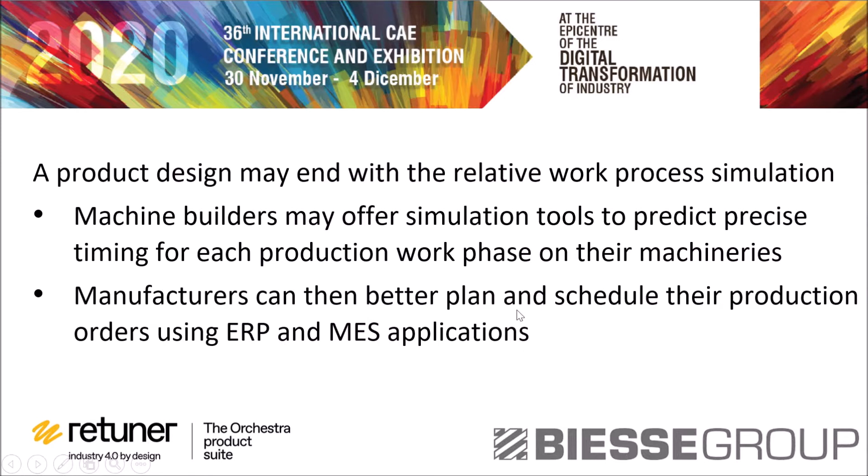Any product design may end with simulation of a work process. Generally, machine builders may offer specific tools to predict timing for each work phase, specifically for their machines. On the other hand, manufacturers can then, using this simulation data, better plan and schedule their production orders using their own ERP and MES application.

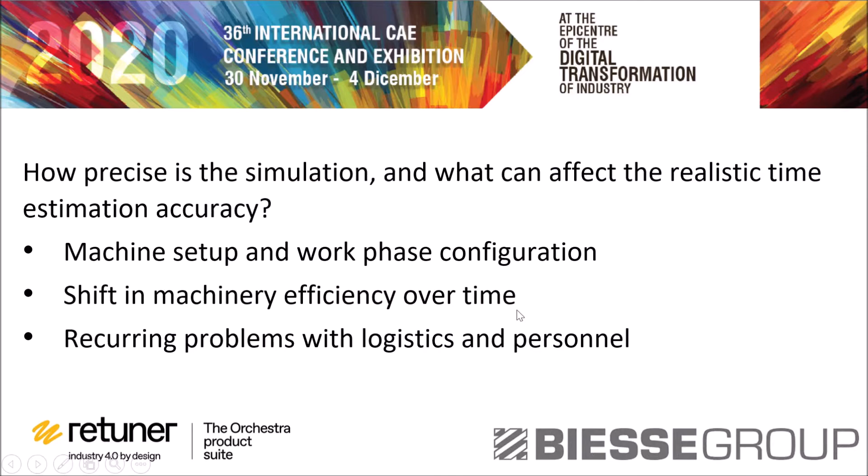But how precise is the simulation and how good can its accuracy be in estimating realistic times for each work phase? We have to take into consideration machine setup and work phase configuration. We have to consider any shifting of the machine efficiency over time, and all problems related to logistics and personnel who can really affect the efficiency of a production phase.

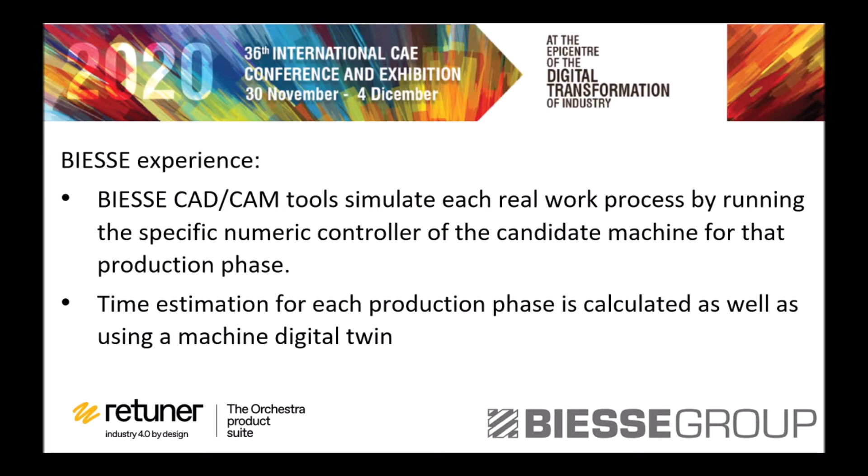Now, let's go inside the BIESSE world. In this presentation, I will talk about how to realistically calculate the production times of a product based on a system developed by BIESSE. Before that, I give you a brief overview of the BIESSE reality. BIESSE is a business unit of the BIESSE Group. Since 1969, it has designed, manufactured and marketed a comprehensive range of technologies and solutions for joiners and large furniture, windows, doors, and wood building components manufacturers. In recent years, it has also been active in the plastic processing machinery sector, developing ad hoc solutions for a growing market.

It consists of a series of applications. The main application, bSolid, offers an environment for the design, programming of machining, and the execution on the machine of a specific product. The platform also contains vertical applications to satisfy market requests, like B_NEST for nesting, B_WINDOWS for the design of fixtures, B_EDGE for edging, etc.

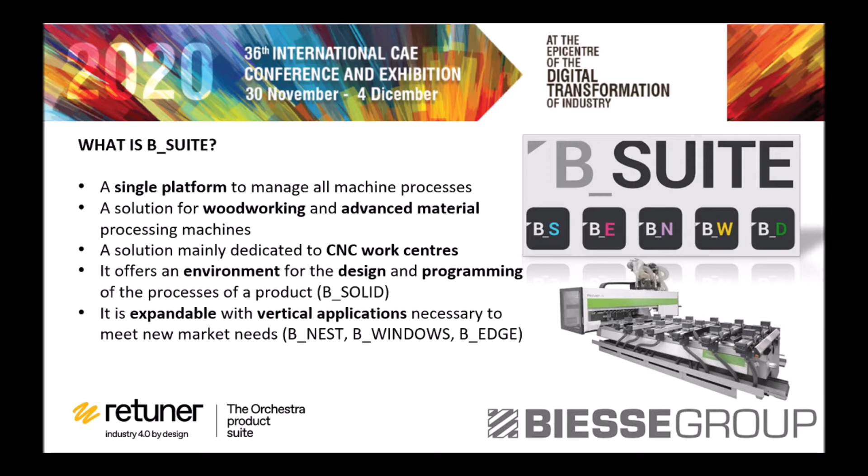Now let's enter the suite and let's see the main application, that is bSolid. bSolid is the center of the suite. All vertical applications of the suite interface with bSolid. bSolid uses various modules offered by the platform to perform its functions. The main modules are as follows. The CAD module offers all the features for CAD drawing. In this module, we can find all the functionalities for two-dimensional and three-dimensional modeling.

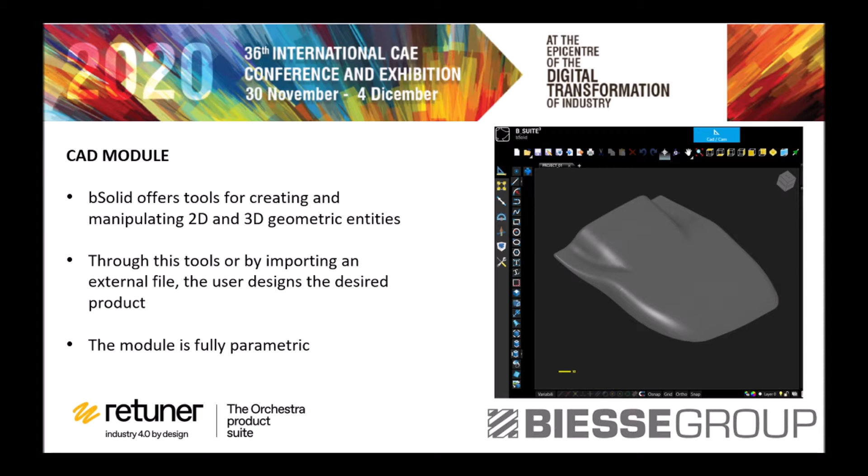As we can see in the image, the user has designed his object in a three-dimensional way. The CAM module is very extensive. Here we briefly...

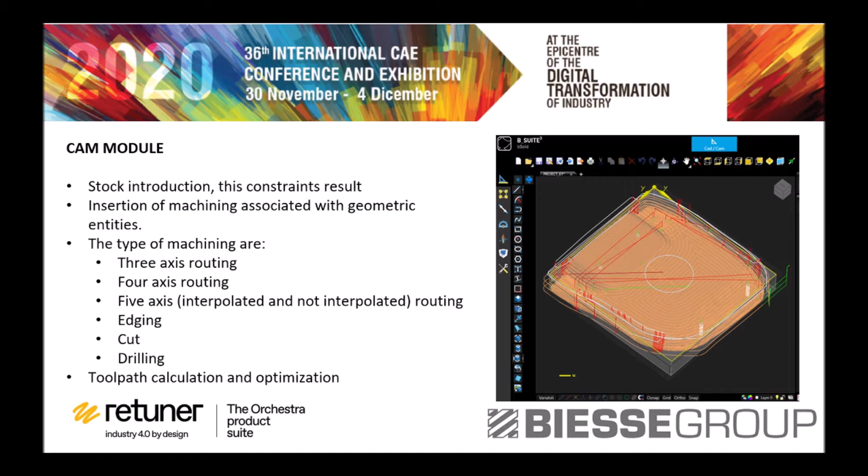During the design, the user often needs to verify that the programming is correct. This is the purpose of the preview module: show the result based on the toolpaths calculated by the CAM. As we can see in the video, the preview makes a mini simulation of the machining based on the toolpaths. The user can adjust the speed or can request to see the result immediately.

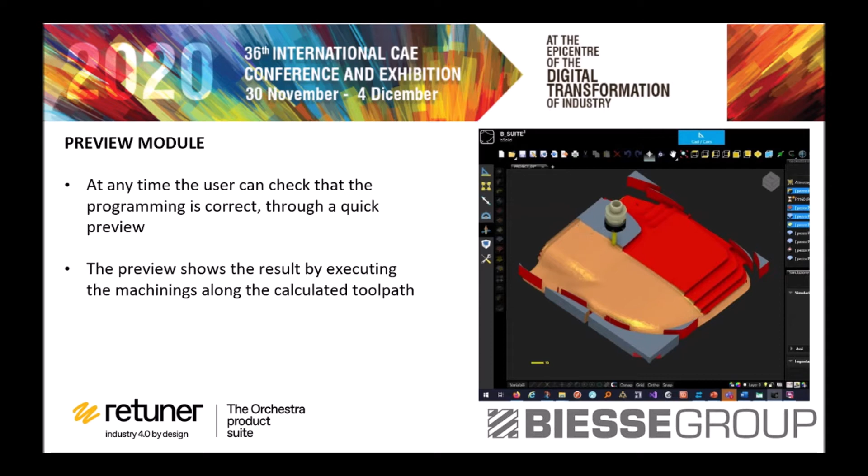In the main slide of B_SUITE, I said that a program is not only made up of toolpaths and geometries, but needs a series of machine operations to run on the machine. This is the scope of machine programming. Machine operations are many. The most important is the tooling of the machine work table, which must receive the piece to be machined.

Piece movements during the execution of the program. This can happen when the machine has to work on either side of the piece. Activation or deactivation of the vacuum in the supports. It's also possible to program a pause to allow the operator intervention, for example for a manual cleaning operation.

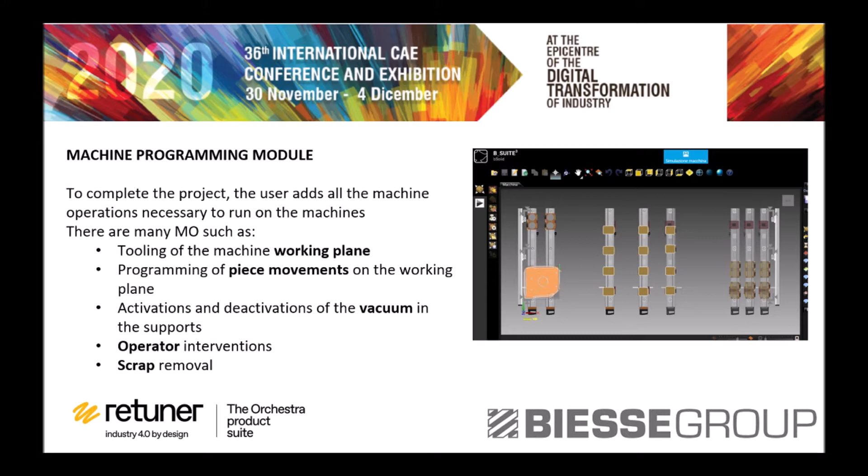Another important operation is the removal of scrap. This can be done manually by the operator or by intervention of a dedicated robot. In the following slides, we will focus on this module.

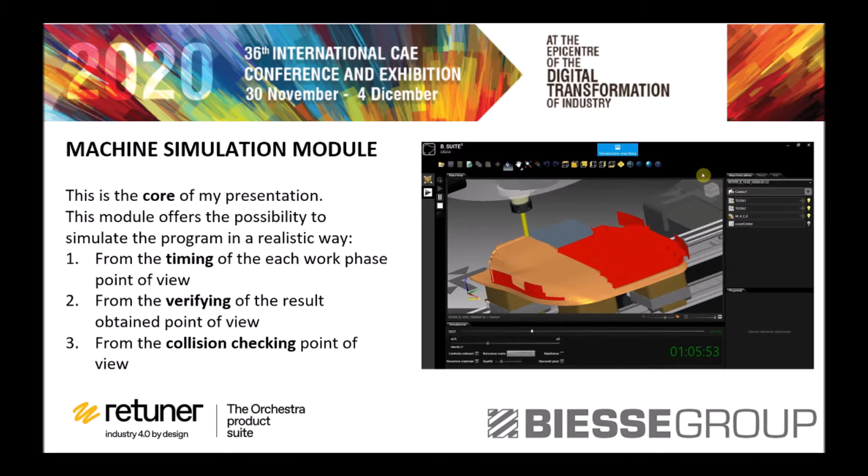The machine simulation module has the purpose to do a realistic simulation on a 3D machine. Realism is a requirement that customers have asked us for, to perform the following tasks. The first task, calculation of project execution time. The second, verify that the result is as expected. The third, but not the least, check that there are no collisions between the machine parts and between the non-cutting part of the tool and the pieces. The concept of realism is very important and will be described later.

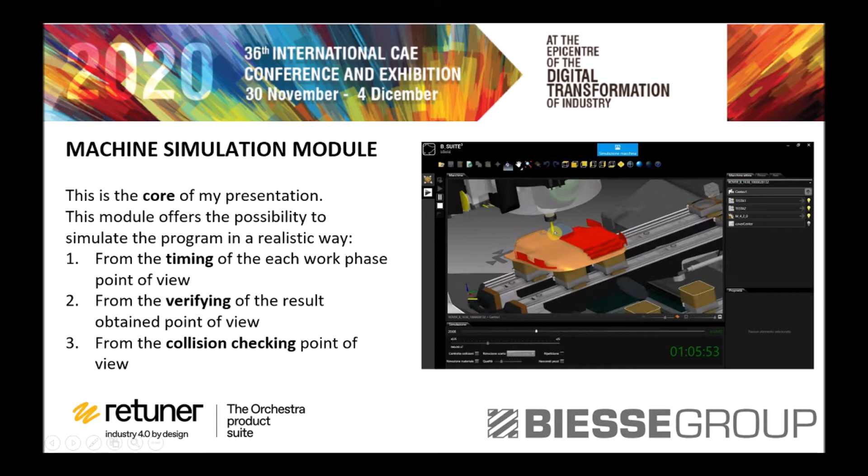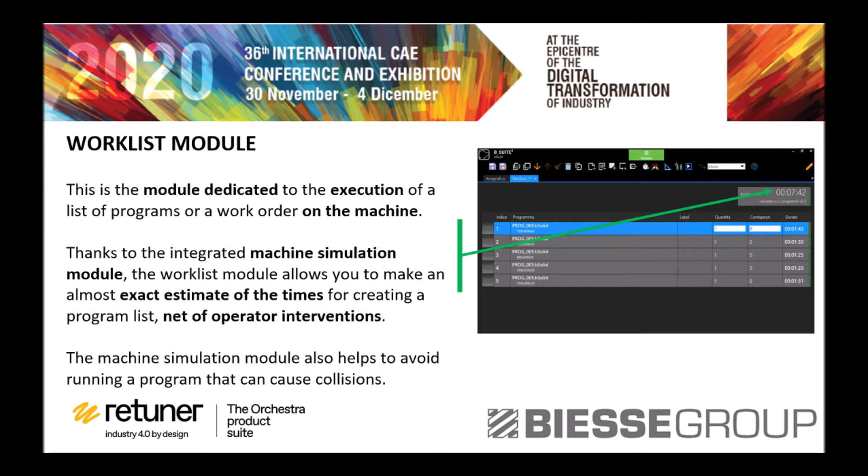As I mentioned earlier, let's focus on the simulation module. I said earlier, the module offers a realistic simulation. Let's start by asking ourselves this question: why is the simulator realistic? First of all, being a software department within BIESSE works out to our advantage.

First, the three-dimensional kinematic model of the machine is the result of collaboration between the designers of our department and the BIESSE technical office. So, the three-dimensional parts come from the technical drawings of the machine designs. As a consequence of the previous point, all the kinematic joints of the model reflect the real machine. Each type of tool aggregate device is synchronized with the real machine, both in terms of its data and in terms of its morphology.

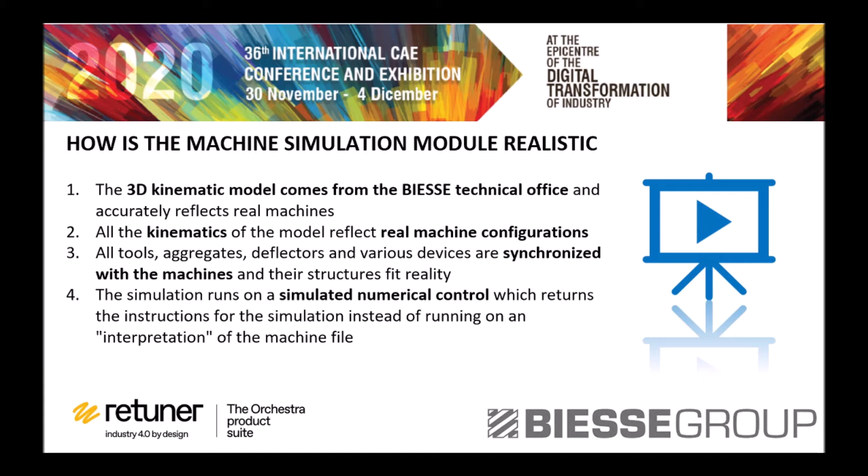This is a very important point. BSolid silently starts a simulated numerical control, which is the same numerical control present on the real machine. When BSolid simulates a program, it executes it on that numerical control, which returns the instructions for the simulation. This is important because BSolid does not do an interpretation of the machine file, but the work is left to the real numeric control. The simulated numeric control reflects the real control in the machine.

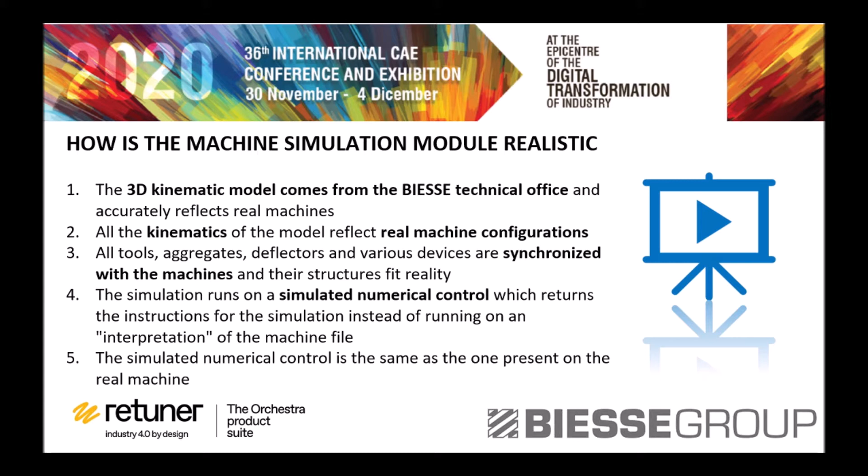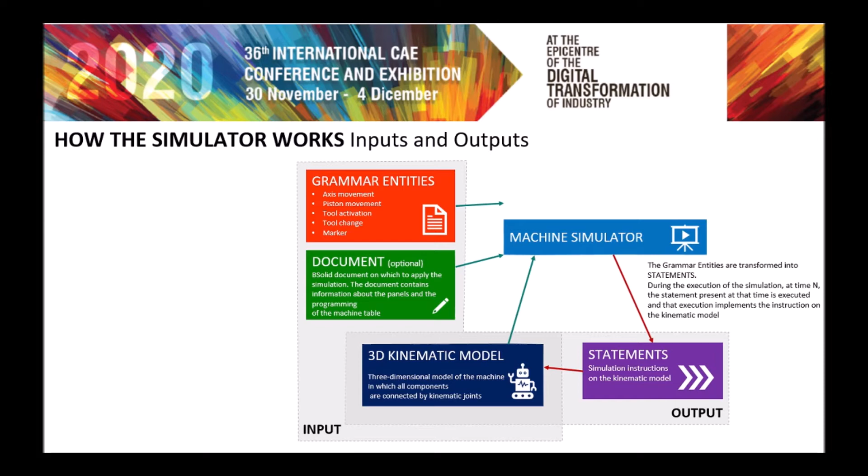In green, another input is the document to be simulated. It contains the piece, machining, and machine operations. In blue, the three-dimensional kinematic model of the machine. In purple, the simulator output, the statements. Statements are the simulation instructions which are applied to the 3D model during the execution of the simulation. In the following slide, we will analyze every single element of input and output.

Let's start with the kinematic model. That is one of the main points for the realism of the simulation. I just said that the technical department provides us the three-dimensional drawings of the machine. Our designers simplify the model by removing the parts that are not important for the purpose of collision control and the success of the simulation. Our designers assemble the various parts of the machine, connecting them with kinematic constraints.

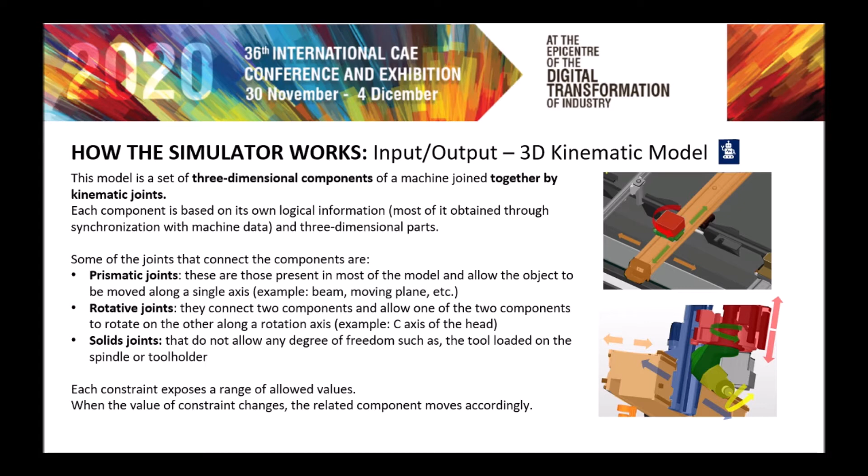For standard machines, the model creation operation is done automatically by the software. The software produces the machine model starting from the machine production list and the data of the numerical control and PLC. The joints that connect the components are of different types, including prismatic joints, like a beam movement, rotative joints, like a 5-axis spindle movement, and solid joints, like a tool loaded in a tool holder.

Another input is the bSolid document. The bSolid document is the result of user programming using the modules offered by bSolid. It contains work pieces, machine operations, and also equipment information like the position of the panels on the plane, top equipment, jigs, supports, plane, etc.

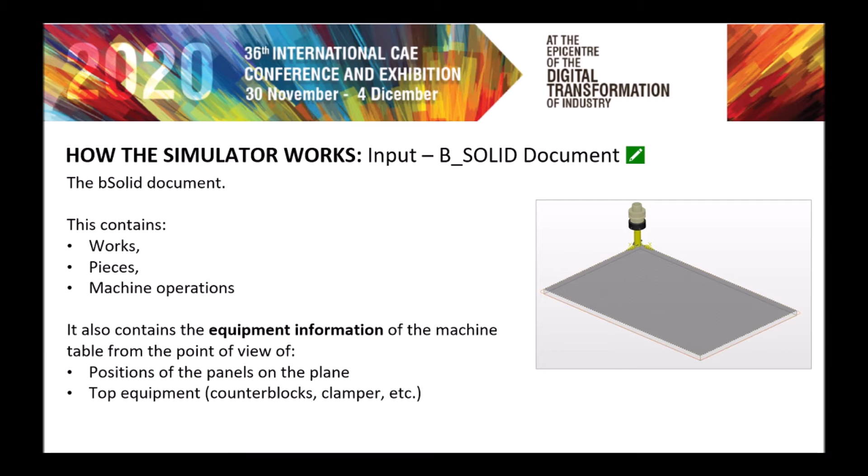Another core of realism are grammar entities. Now let's see how grammar entities are produced. Let's start with the user who requests the system to simulate a program or document. bSolid processes that program by calculating its machining, optimizing the machining processes, and generating the machine code, in this case ISO code. The ISO program is executed in the simulated numerical control.

The numerical control is made up of various services. One of these services includes a component called bSolid DLL, developed by us in collaboration with departments that manage the numerical control. What happens inside the bSolid DLL component? At each cycle, the bSolid DLL accesses positions on the shared memory of the numerical control, PLC tables and ISO markers. It makes the appropriate change checks and populates an instruction queue shared with bSuite.

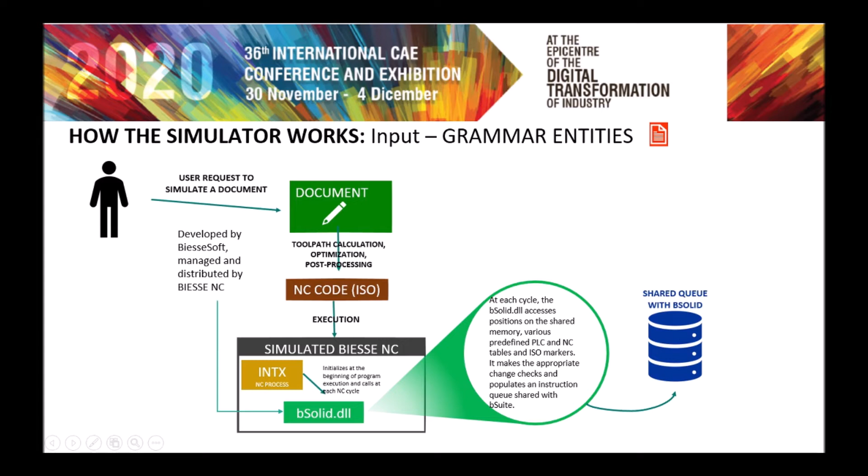The simulation module reads the shared queue and extrapolates the grammar entity. We can see that the grammar entity contains movement of an axis, tool activation, spindle activation, little simulation instructions.

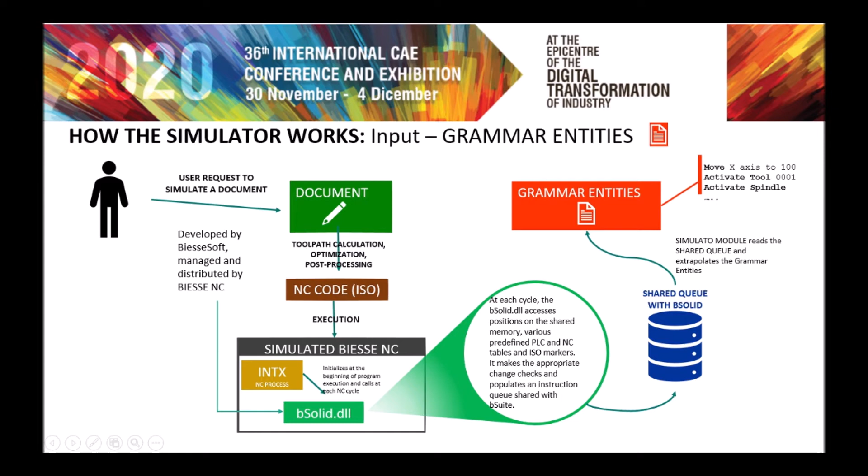Finally, let's see the output of the simulator, which we called statement. We said that the grammar entities are instructions from the numerical control. They are simple instructions, such as the movement of a machine axis, the activation of a tool, the loading of a tool, panel handling, etc. The statements are the result of the elaboration of the grammar entity by the simulator, and they are operations that act on the three-dimensional model to implement the movements of the simulation.

Simple instructions contained in grammar entities can give rise to more complex statements. For example, suppose we receive the movement instruction of axis A1. The simulator recognizes that that axis is associated with the gripper on the machine, which is meant to clamp the workpiece. The simulator then moves the gripper but also executes the piece clamping instruction. In the next slide, we can see this part of the simulation.

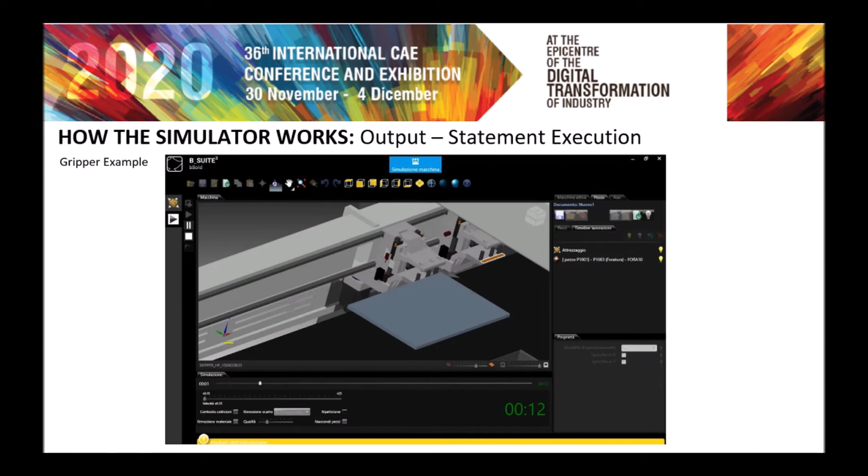Thanks, Marco. Very well. And now let's see what we do in Orchestra. We like to say that we retune SMBs to play the same Industry 4.0 music sheet. And let's take a look together at this small video.

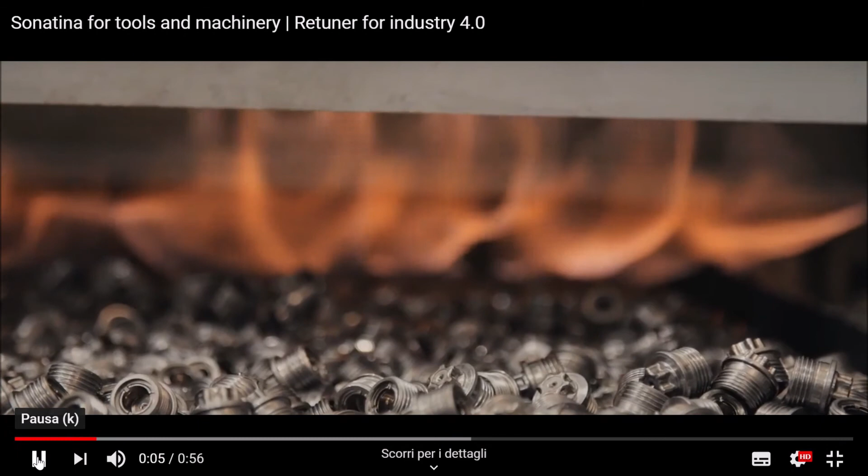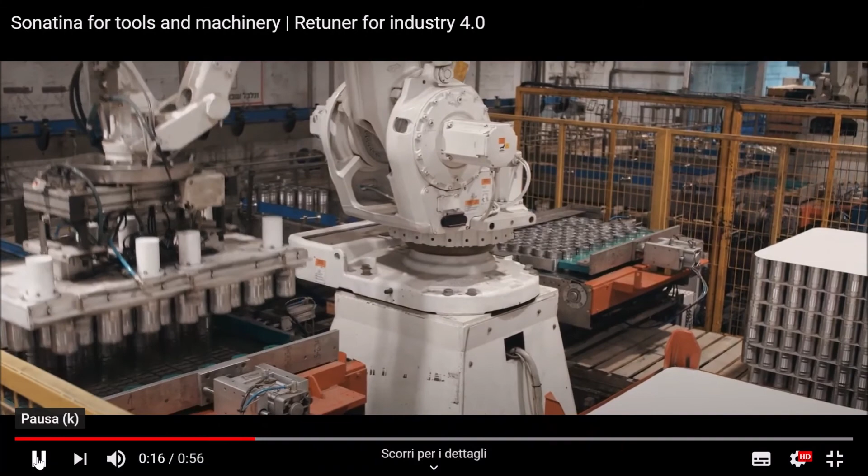We all know it, deep down inside. The factory can seem like a complex place. Workers, suppliers, processes, tasks, maintenances, breakdowns, and some downtimes. Every single element appears to be beating to its own personal rhythm, regardless of what's happening around it. Our vision is that of a connected factory, harmonious and well-tuned.

Over time, we perfected the craft of getting older machines to superbly interact with their newer counterparts. Complex? Not for us. It was all about finding the perfect tune.

Well, but now, what is our experience in the real manufacturing world? When we collect data, production data from the machines, and we compare with the simulated timing generated by CAD/CAM tools, we find very often a lot of discrepancies. There are too many unpredictable and recurring events that must be considered if we really want to estimate a production phase timing with a certain accuracy.

Moreover, each machine has different controllers, programming and protocols, and machine signals must be normalized. If we take two different machines, the status of the machine in ready, work, hold, idle, and so on are not always equivalent and require additional algorithms to be normalized.

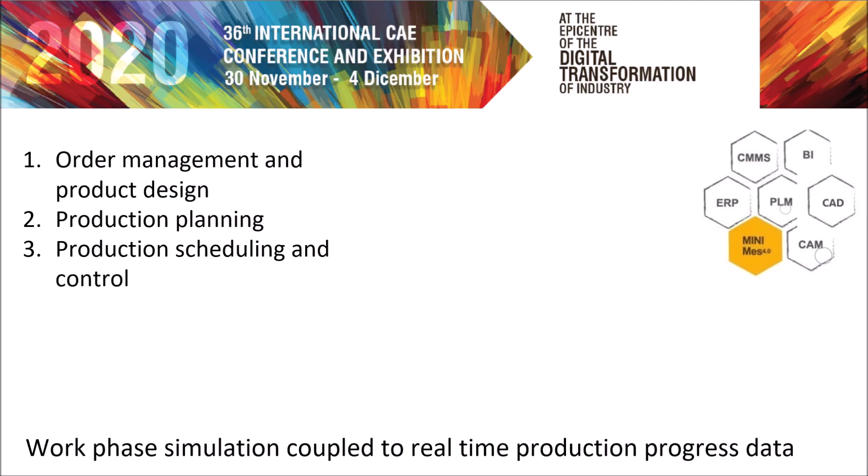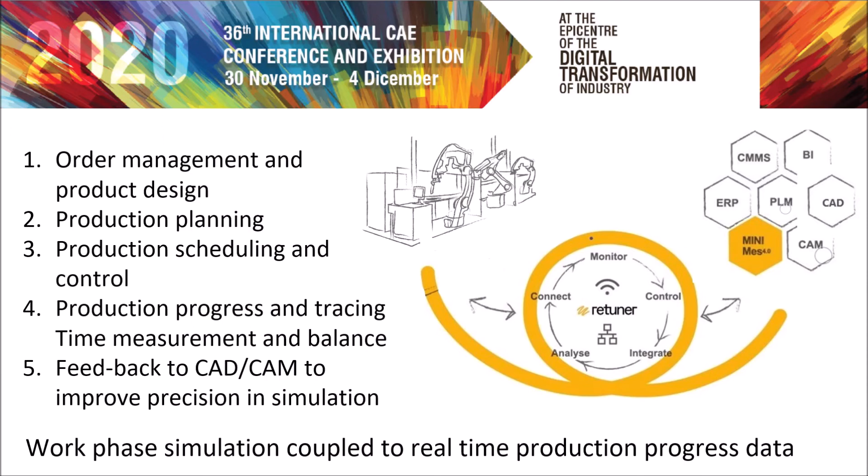And to proceed with production progress and tracing, time measurement and balance, and here we apply the rest of our technology, which under the name Retuner allows the connectivity of any type of machinery and plants in order to connect, monitor, control, integrate and analyze any data flowing from the shop floor. And using this data we can then feed back the CAD/CAM to improve precision in simulation.

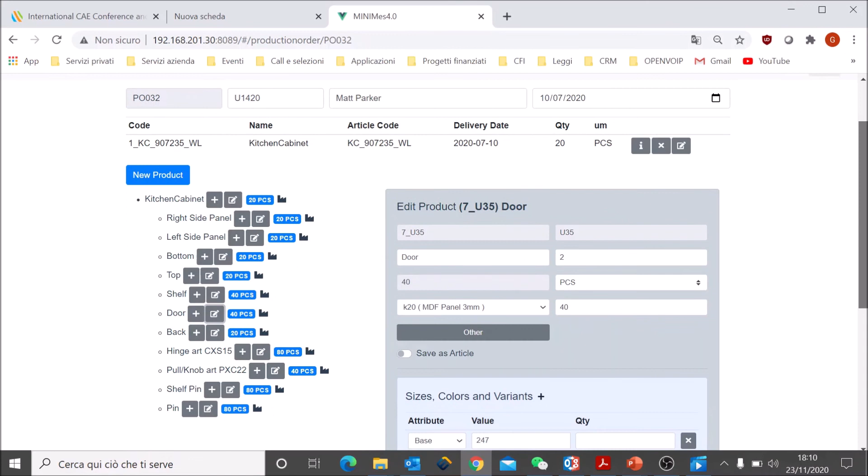Let's see how a typical small medium business in manufacturing can take advantage using our solution. Using our MINIMes 4.0, a manufacturer can define or import his own production order. Each production order has one or more products. Each product has a full bill of material, and for each component of the bill of material, like the door, I have all the information that I need to use for the production of this component, including the different work phases, like a milling phase.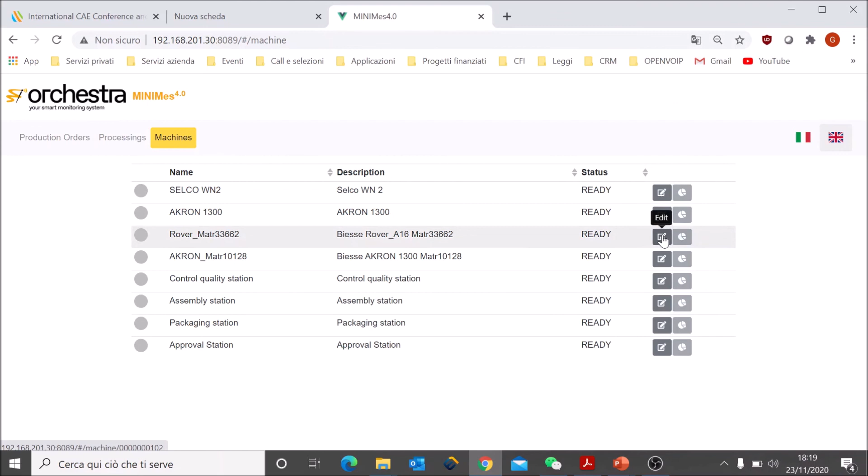And when we look at machineries and I open the machine where the milling has been done, I can check all the statuses which occurred during this work phase. And for each status I have the lasting in terms of start and ending time.

Based on all these details, I can then compare all the work status, where I have also the quantity of items which has been produced for each work status, and the lasting of a specific status. With this information, we can feed back the simulation tools and be ready for a better estimation.

We are now close to the end, and the conclusions are that simulation tools and CAD/CAM software tools get major benefits when coupled with real production data. This helps to better plan and simulate the lasting of each work phase.